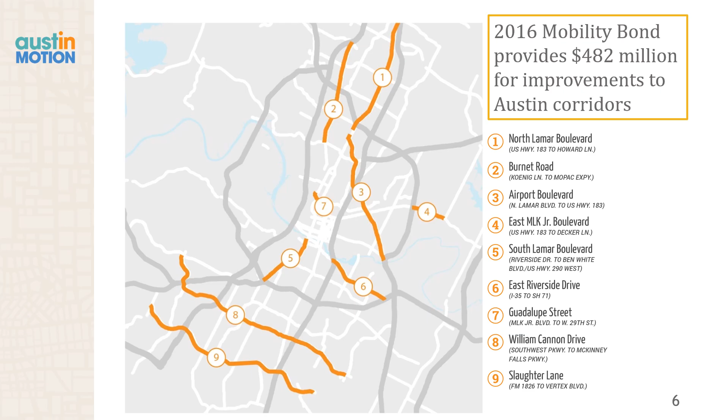This virtual public hearing will focus specifically on the segment of Burnet Road beginning at US 183 and extending north for 2.5 miles to the Mopac Frontage Road.

The City of Austin conducted an environmental analysis to understand the potential impacts of the proposed mobility, safety, and connectivity improvements for the entire Burnet Road corridor.

For Burnet Road between US 183 and the Mopac Frontage Road, the analysis was conducted in accordance with the National Environmental Policy Act, or NEPA, because this portion of Burnet Road is owned and maintained by TxDOT.

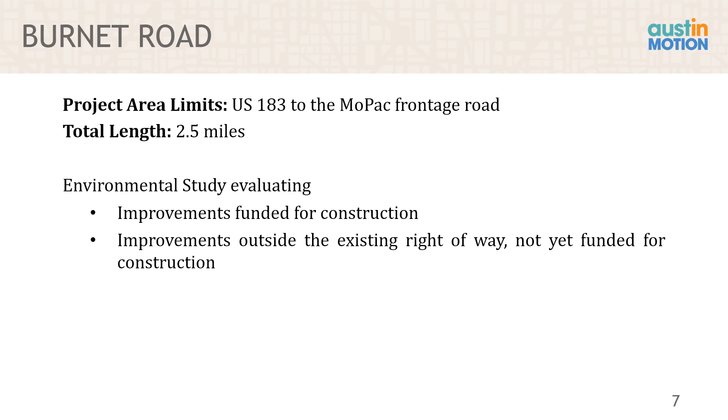Some of the proposed improvements evaluated by the City of Austin would be funded by the voter-approved 2016 Mobility Bond. The City has also evaluated the environmental impacts of additional improvements outside the existing right-of-way, which are not yet funded for construction.

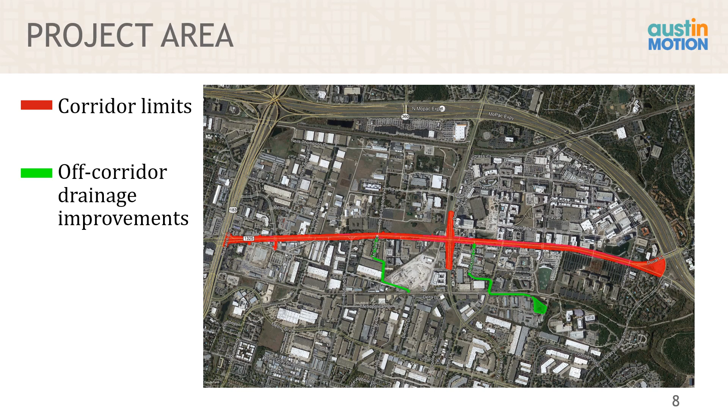There are no existing bicycle lanes, and existing sidewalks lack connectivity. The existing drainage is generally an open ditch system and therefore further hinders pedestrian mobility.

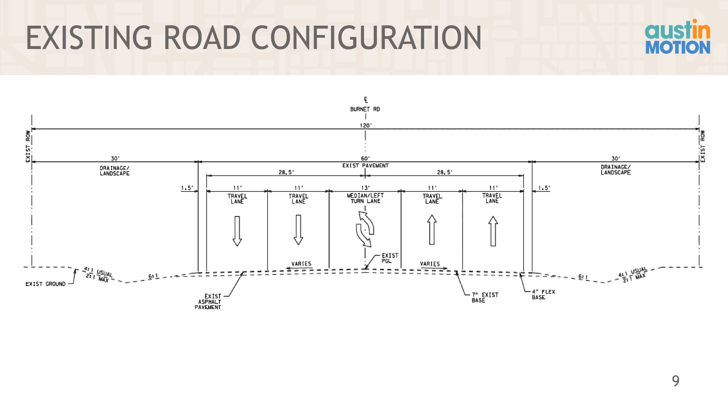The purpose of the project is to address safety concerns and congestion on Burnet Road. Over 35,000 vehicles travel this major Austin roadway per day, and approximately 60 access driveways in 2.5 miles create additional safety concerns.

According to crash data collected by the Austin Transportation Department, there were more than 900 crashes on this section of Burnet Road between 2015 and 2020.

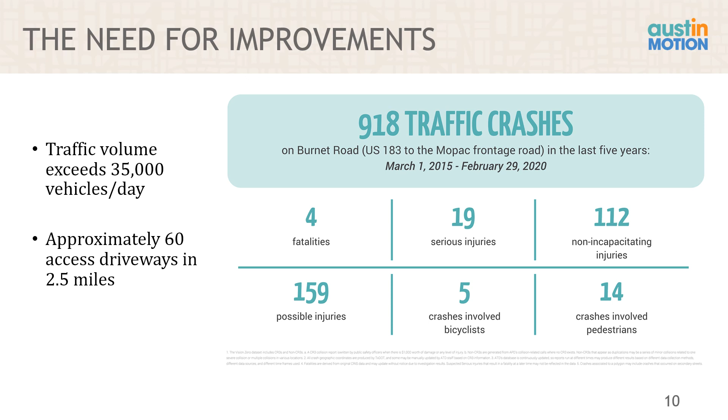Those crashes resulted in 23 fatalities or serious injuries. 19 bicyclists or pedestrians were involved in crashes throughout that time observed.

Proposed improvements are expected to improve mobility, safety, and connectivity along this 2.5-mile section of the Burnet Road corridor for all users, whether they walk, bike, drive, or take transit.

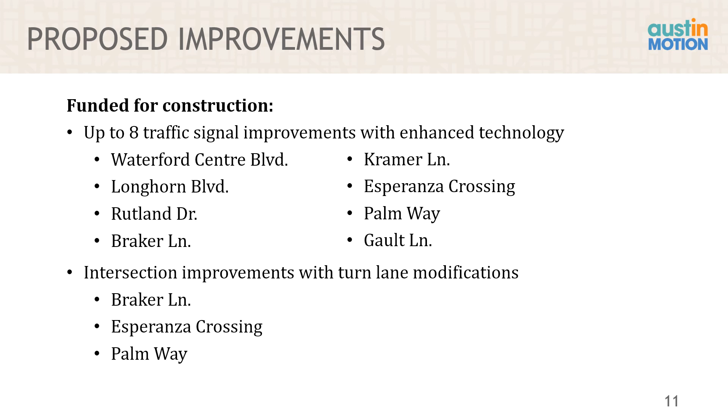The funded project would include up to 8 traffic signal improvements with enhanced technology, as well as intersection improvements with turn lane modifications in 3 identified locations.

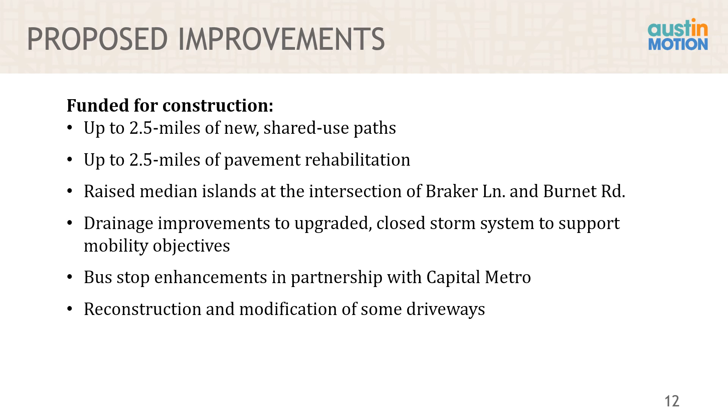The project would also include shared use paths, pavement rehabilitation, raised median islands, drainage improvements, bus stop enhancements, and the reconstruction and modification of some driveways.

The city has also evaluated the environmental impacts of additional improvements outside the existing right-of-way, which are not yet funded for construction. These would include 2.5 miles of full street reconstruction to widen Burnet Road from 4 lanes to 6 lanes, with an additional through lane in both travel directions.

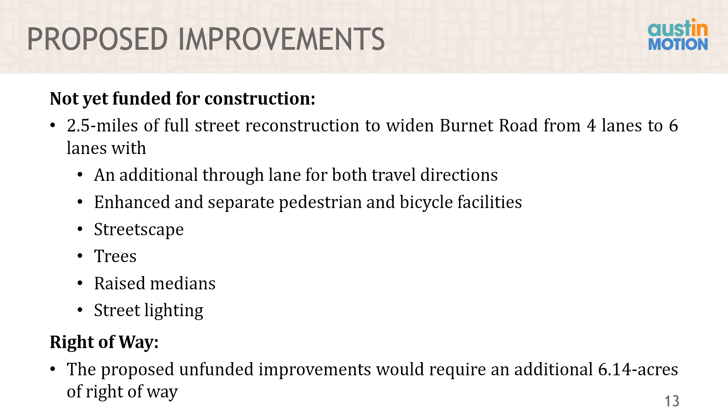This would include enhanced and separate pedestrian and bicycle facilities, streetscape, trees, median islands, and street lighting. The unfunded improvements would require an additional 6.14 acres of right-of-way.

This typical section provides a view of what the proposed funded improvements would look like. The project would largely be constructed within the existing right-of-way. Starting from the outside moving in, 9-foot shared use paths would be on either side of the road with up to 11-foot landscape sections separating cyclists and pedestrians from the travel lanes.

It should be noted that the near-term funded improvements would require limited right-of-way, with needs generally restricted to areas at major intersections with turn lanes. The northbound and southbound travel lanes would remain, and landscaping would be added to the median islands.

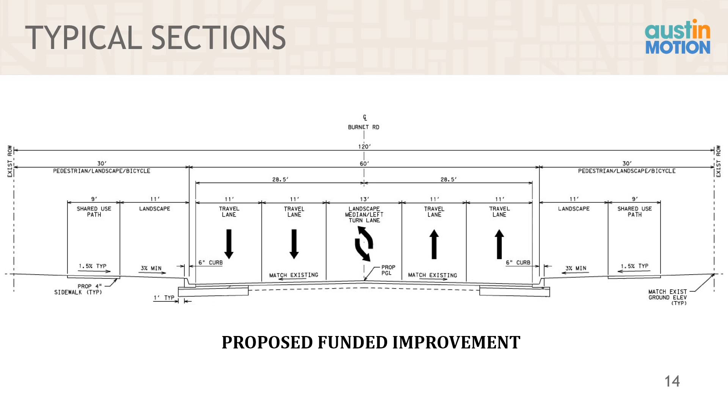This typical section provides a preview of what the proposed unfunded improvements would look like. The right-of-way would be widened from 120 feet to 145 feet. Starting again from the outside and moving in, the bicycle and pedestrian facilities would be separated and enhanced.

There would be an 8-foot sidewalk, a 7.5-foot landscape section, and a 7-foot bicycle lane. A 2-foot buffer would separate cyclists from the travel lanes. An additional through lane would also be added in both the northbound and the southbound directions.

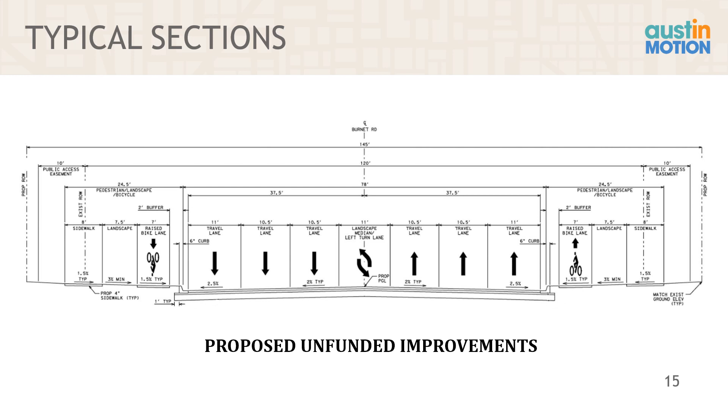I will now discuss the environmental studies completed for the proposed project. These studies considered the potential impacts of the unfunded improvements as discussed in the previous slide. As part of the project's compliance with NEPA, the City of Austin assessed traffic noise, cultural resources, hazardous materials, water resources, biological resources, and social and community impacts within the corridor.

Overall, impacts to environmental resources would be minimal. Throughout the development of these improvements, the city worked to reduce and minimize potential impacts. Following is a summary of the identified impacts.

The project contains suitable habitats for 16 species of greatest conservation need. The project would potentially impact 0.58 acres of riparian habitat. Coordination with the Texas Parks and Wildlife Department has been completed.

The following best management practices, or BMPs, would be implemented to minimize biological impacts: vegetation BMPs, amphibian and aquatic reptile BMPs for Woodhouse's toad, terrestrial reptile BMPs for the eastern box turtle, bird BMPs for the western burrowing owl, and bat BMPs for the cave myotis, big brown bat, eastern red bat, hoary bat, and Mexican free-tailed bat.

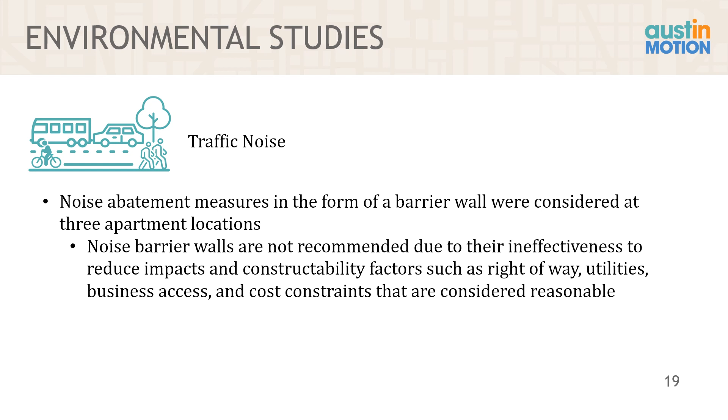Upon further analysis, it was determined that the noise barriers would not be feasible due to ineffectiveness in reducing impacts and constructability factors such as right-of-way, utilities, blocking business access, and cost constraints that exceeded approved reasonable noise wall barrier cost as set by the Federal Highway Administration.

No displacements are anticipated as a result of the proposed project. Access management measures, including median islands and driveway consolidations, are proposed to improve safety and mobility for all users. The project would include the closure of 8 driveways.

However, properties impacted by driveway closures would remain accessible by other access points to the property. The proposed project includes intermittent raised median islands throughout the project area to control left turn movements and to reduce the risk of potential crashes, as well as improve comfort levels for motorists and pedestrians.

Limited English proficiency, or LEP, populations were identified within the project area. LEP persons were given and will continue to be given the opportunity for meaningful involvement in the NEPA process. The project would not have any adverse impacts on low-income or minority populations.

The bike lanes, sidewalks, and intersection improvements were included in the design to provide a safe environment for bicyclists and pedestrians. The Burnet Road project is consistent with the Capital Area Metropolitan 2040 Regional Transportation Plan adopted in 2015.

Overall, the project would provide increased safety and connectivity for all modes of transportation, which is consistent with the City of Austin's Strategic Mobility Plan.

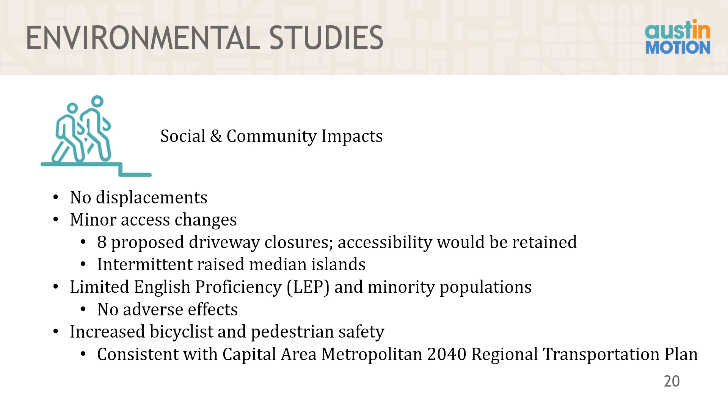2 potential waters of the U.S. were located within the project limits. It is anticipated that any impacts to waters of the U.S. would be authorized through Nationwide Permit Number 14 for linear transportation projects.

No wetlands were identified within this corridor. The project would meet Section 401 Water Quality Certification and would require compliance with Section 402 requirements under a blanket certification from the Texas Commission on Environmental Quality, or TCEQ, for projects permitted by Nationwide Permit Number 14.

Coordination with TCEQ would be required under their Memorandum of Understanding with TxDOT.

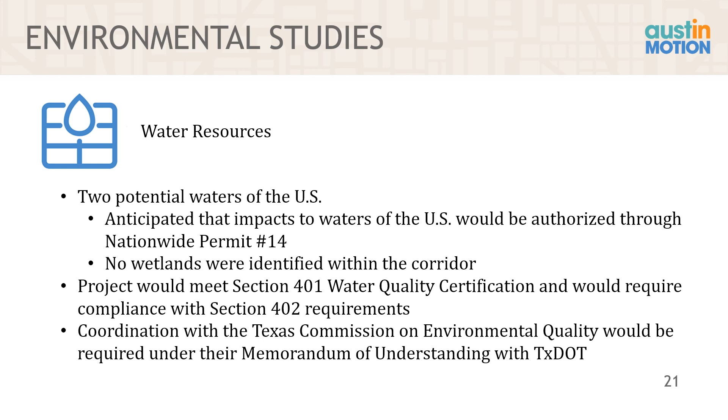We anticipate that the project will receive environmental clearance this summer. Plans for our first construction project at the Burnet Road and Breaker Lane intersection are currently in development and should be completed in summer 2020.

Some utility relocations are expected as part of this project. The anticipated construction start date is late 2020.

Plans for the improvements for the remainder of the project area from US 183 to the Mopac Frontage Road are in concurrent development and should be completed in fall 2021.

As a reminder, these project limits of Burnet Road, owned and maintained by TxDOT, are the focus of this presentation. Some utility relocations are anticipated as part of this larger project. The anticipated construction start date is late 2022.